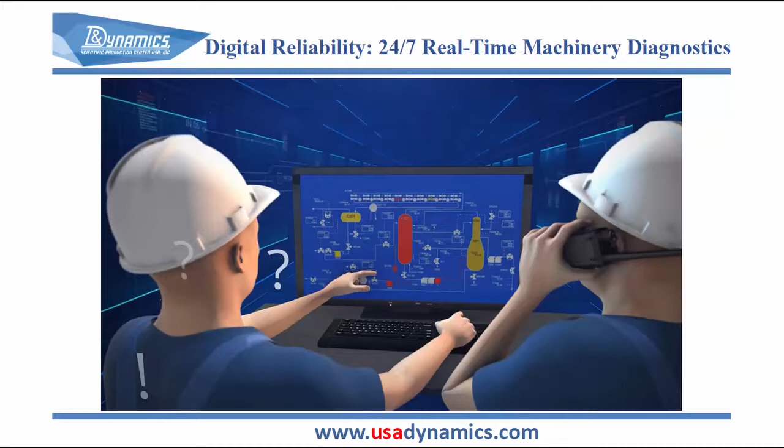It gives an opportunity not just to prevent the possible issue, but also allows people to eliminate future issues at an emergent stage, and to prevent not just failure, but even redundant maintenance and repair.

Within the last 70 years, the conventional approach to keeping reliability of machinery at a certain level hasn't changed significantly. It's based on 3 primary pillars: a safety factor, which is the ratio of a machine's structural capability to actual applied load; operational discipline of personnel, which is always striving to do the right things in the right ways; and failure recognition capability, which is an ability to predict failure before it happens.

At the beginning of the reliability era, the primary method for extending reliable uptime of machinery was increasing the safety factor. However, significant over-increasing of structural capability to actual applied load led to rising costs of machinery, which negatively impacted consumers' interests. So since the middle of the 50s last century, several approaches to providing reliability of machines were developed and implemented, such as preventive maintenance, proactive maintenance, reliability-centered maintenance, and others.

But all of those approaches have 2 common issues: poor statistics for machinery lifespan and human error. To confine the influence of those factors on reliability, since the 70s the main focus moved to increasing the failure recognition capability. Until now, scientists, engineers, and practitioners attempt to point out an instance of a machine's failure to be able to prevent its breakdown using different instruments and methods.

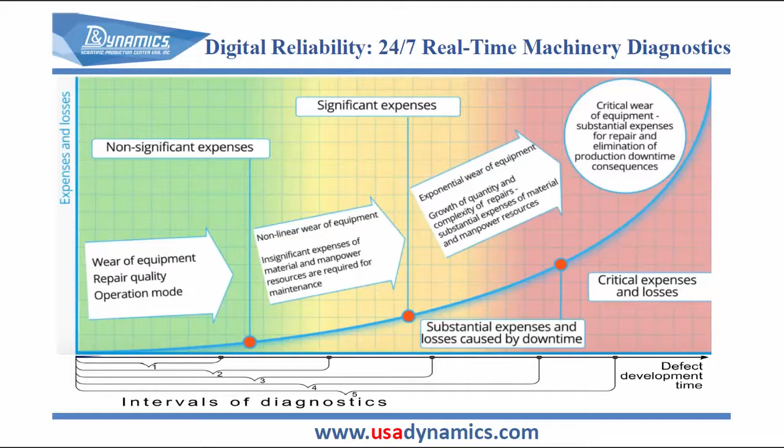While diagnostics itself is a process of defect detection, early diagnostics is a process of defect prevention. Existing solutions such as protection or condition monitoring systems are focused on confining consequences, not preventing breakdowns.

DCS merely shows the failure, at best correctly starting the emergency shutdown to minimize the consequences of equipment failure. It doesn't identify the fault at an early stage of degradation and take urgent actions to eliminate it. If the protection system alarms, the breakdown happens, or almost happens.

Even AI software solutions work at the end of the exponential wear stage, because the AI analyzes the same parameter that condition monitoring or protection systems measure.

Also, almost all condition monitoring systems require an expert to interpret them. Without that interpretation, the operator cannot understand what should be done to prevent an impending failure. This is the main reason why most breakdowns and accidents happen on the night or weekend shift, when the expert is not on duty at the facility.

To not only prevent failure but even repairs and maintenance, we need to identify the emergence of issues in the nonlinear wear stage, when destructive forces are just beginning to degrade the equipment. Operators need precise, proven, and timely information about what should be done to recover equipment health.

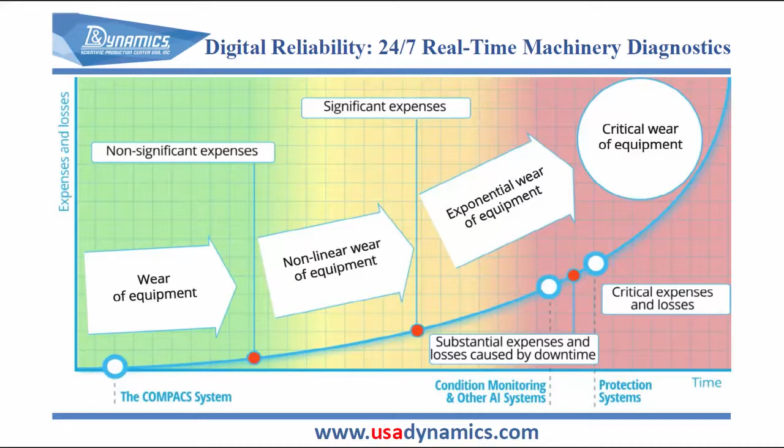The COMPACS system monitors all types of rotating equipment, including centrifugal and piston compressors, pumps, air coolers, etc. The system could be integrated with DCS, PI, and other systems over either Modbus or OPC UA interfaces.

The system monitors the health of every piece of equipment every 3, maybe 5 minutes, depending on the quantity of equipment at the facility. The diagnostic station is located in the control room, while the SCADA-type field bus gathers proper data for physics-based artificial intelligence.

Thus, artificial intelligence transforms sudden defects into gradual ones and alerts personnel by prescriptions on what actions need to be taken to prevent failure.

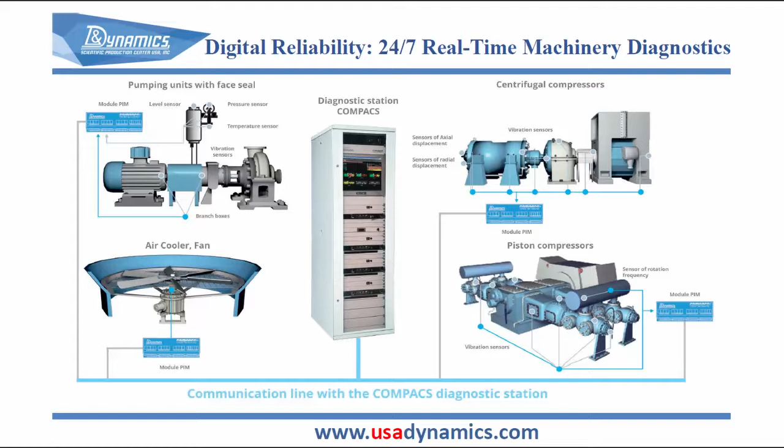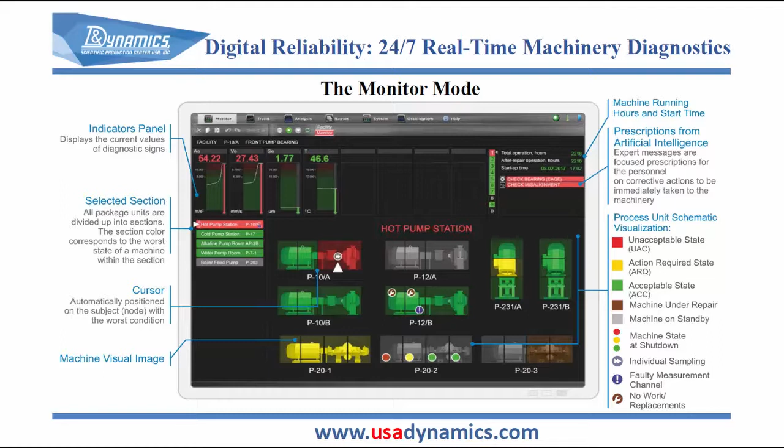The COMPACS system incorporates physics-based AI that identifies particular signs in the vibration signal which are related to particular defects and malfunctions. The physics-based AI consists of a library of rules of equipment degradation and a bunch of algorithms that could be chosen by AI to identify particular defects and malfunctions. Decades of scientific research are behind the components of AI. The physics-based AI is developed to recognize a wide range of defects and malfunctions in various types of equipment.

The system software itself doesn't contain machine learning algorithms, but they are used widely as updates are developed. The system has several rules of degradation which describe every defect or malfunction as a list of parameters of the vibration signal and other signals. Every parameter has its own threshold and strong correlation with a particular specific defect. So if the system identifies the parameter in a vibration signal, the defect exists and its stage of degradation is determined. This is the main difference between statistical-based AI and the physics-based AI we offer.

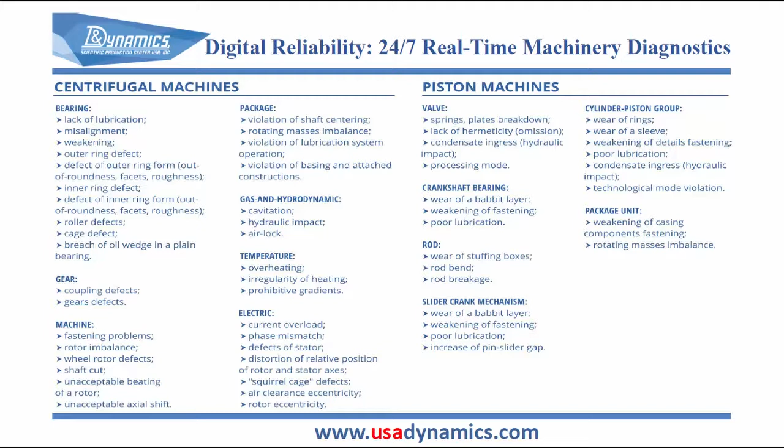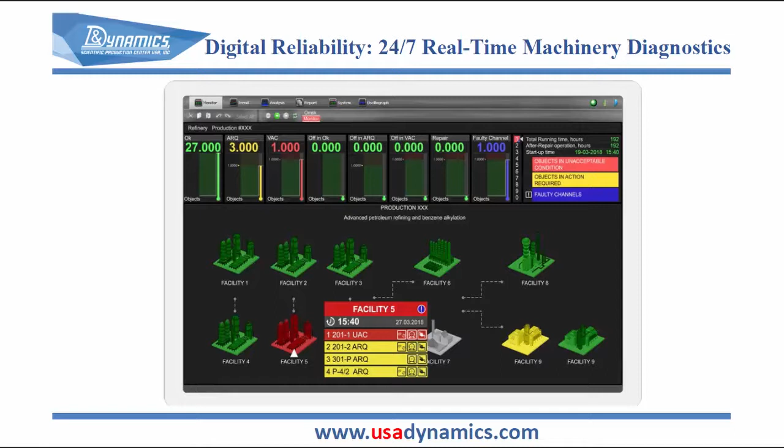The first information loop is dedicated to operators. Operators should play a crucial role in the reliability of the facility because they are at the facility 24/7. Therefore, the system identifies malfunctions of every piece of equipment in the facility and sends precise and timely prescriptions to operators. Operators are the only people who could prevent degradation at an emergent stage because they are still at the facility 24/7. This is the reason why we promote the operators-driven reliability approach. When prescriptions are received, they need to take urgent actions to improve equipment health and reliability. They could do this by themselves, call the maintenance department, or schedule contractors.

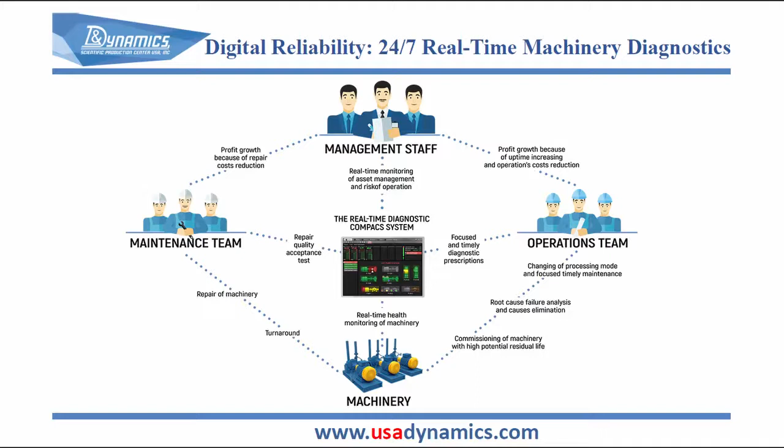In order to confine the influence on humans, we also have a third information loop for management staff. Management receives unbiased information about machinery health, about operators' involvement in the reliability process, and the quality of maintenance performed. The COMPACS system provides transparency for everyone involved in the reliability process. When people work together, they try to be better because they work in a transparent environment.

In terms of economic efficiency, the real value which the real-time diagnostic COMPACS system and digital reliability approach brings to a petroleum refinery comes from several sources. First, it prevents accidents and shutdowns. According to analysis of several trustworthy sources, in 2017 alone the average amount of annual refinery losses due to unscheduled shutdowns was approximately $150 million. Thus, by transforming sudden defects in machinery into gradual ones, refiners could avoid most of these incidents and corresponding losses, saving at least $100 million. Another source of value is extended uptime.

By decreasing turnaround outage and extending average uptime from the existing 91% up to a technically possible 99%, an average refinery could bring roughly $100 million of additional profit.

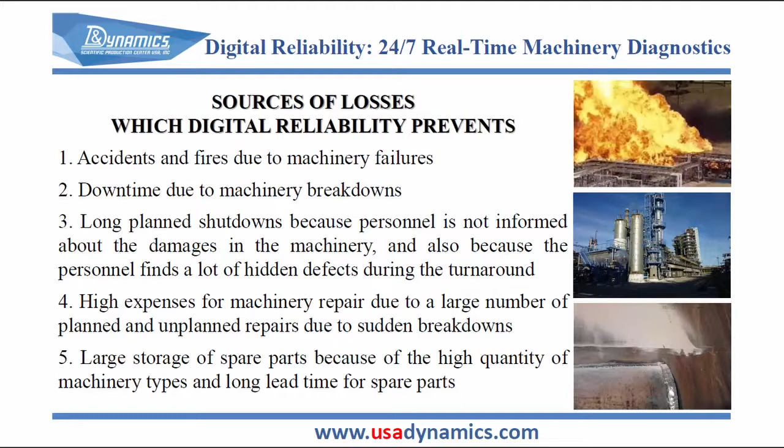An average US refinery spends over $9 million annually on maintenance, which could be reduced significantly as well. Totaling these figures, the total additional profit from a digital reliability approach based on the COMPACS system implementation for an average US refinery could reach $200 million annually.

Summarizing this, let's list the bullet points of digital reliability. In order to reach desirable outcomes in safety and uptime, digital reliability requires proper infrastructure for collating useful data from trustful sources using the SCADA structure.

Second, it needs physics-based artificial intelligence, which operates by invariance to extract information in time. Finally, it requires a planned diagnostic network for simultaneous information delivery to all levels of decision-making, from operators and engineers to managers.

The COMPACS system is the only one that meets those requirements and assists refiners to make the reliability paradigm shift toward safe, resource-saving operation and maintenance of machinery. It brings timely and objective information about machinery health, operators' involvement in reliability, and maintenance quality.

Moreover, it provides financial benefits which exceed investments in this solution by at least 10 times, provides confident safety of process operations, and generates prosperity for all who are involved and for those around them.

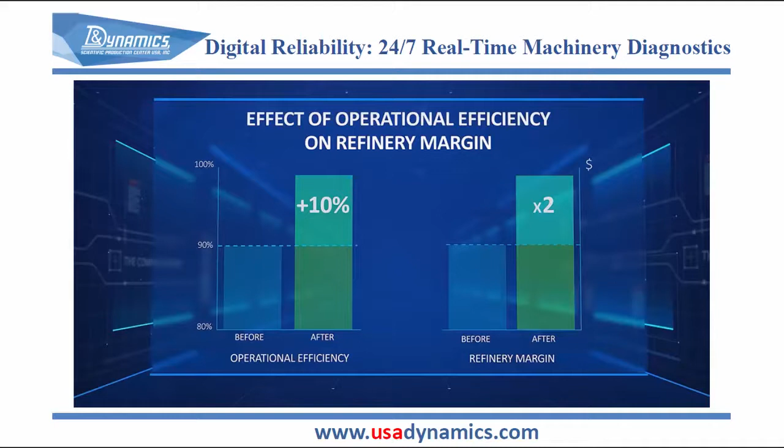In the last part of my presentation, I'd like to demonstrate how you could use digital reliability to approach paramount safety and uptime. To do that, you need to go through 3 steps. First is improving existing reliability.

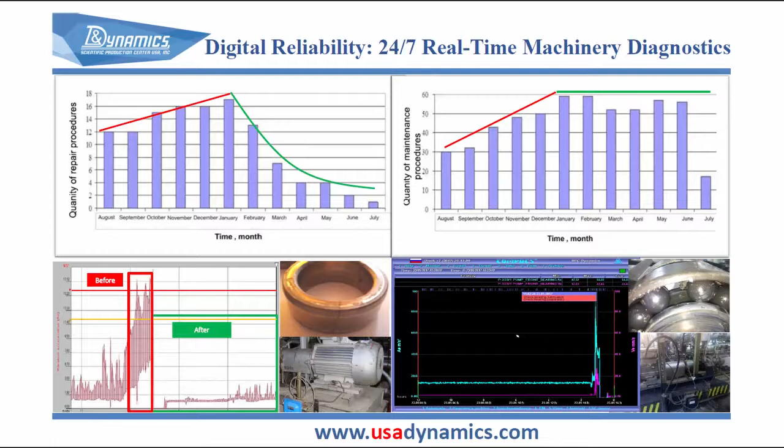But that was just the first step. The second step is eliminating the root causes of failures.

After the impeller was dynamically balanced, its health improved considerably. It also moved to an acceptable state, and its vibration decreased significantly. The root cause of the exhauster failure was impeller imbalance.

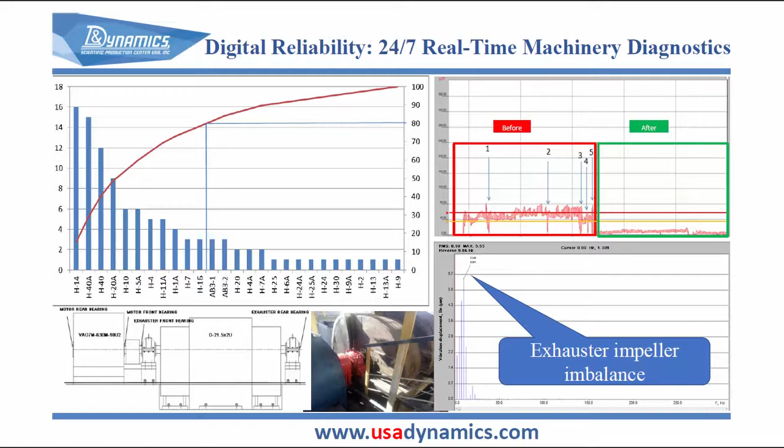Eliminating the root cause not only reduced the risk of unscheduled and unpredictable failures at the facility in the future, but also confirmed an upgrade to the existing maintenance procedures to include dynamic balancing in the map of the procedure. The third step toward safety and reliability is eliminating bottlenecks.

This is probably the most expensive step, but it's essential, because when the facility was designed and constructed, there was little concern with using the best engineering solution. Most engineering companies use technical solutions that are just good enough to get the facility running. Construction companies use the cheapest acceptable materials and contractors, and owners also don't want to overpay for the best solutions. As a result, there are several bottlenecks that confine the uptime of the unit.

When the reliability team compared the trends of valve deterioration with the trends of hydraulic shocks, they figured out there is a correlation. After each hydraulic shock, the suction valves quickly deteriorated. Further investigation revealed that there was no filter before the compressor, and it was dirty gas causing hydraulic shocks and consequently valve deterioration, thus poor compressor reliability.

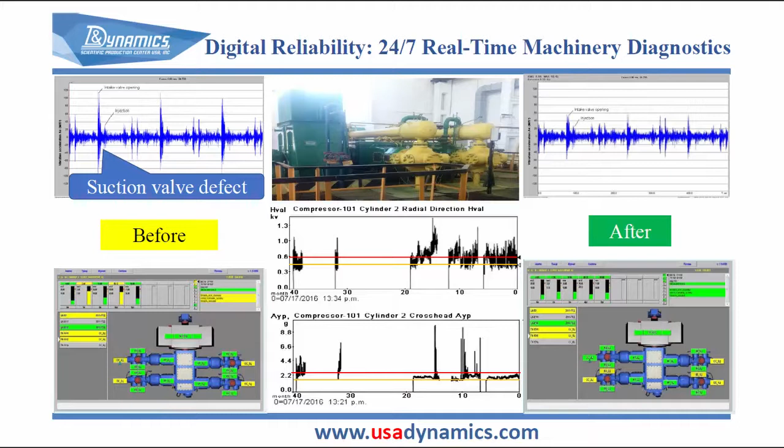Reactive maintenance is around 0% because if you know exactly what kind of issue a piece of equipment is having at an early stage, you don't need to wait till the issue turns into a failure. You can proactively eliminate it at the best possible time. Not everyone achieves this, but the Aromatics unit at the Omsk refinery did it. They have really achieved on-demand plant maintenance.

But what we're most proud of is the unit's availability, which is over 99%. The Omsk Aromatics unit operated for 3.5 years with zero downtime. This was possible not only because the COMPACS system prescribed timely maintenance and repair actions, allowing equipment to run without shutdown for the maximum amount of time, but also because the personnel are really involved in reliability and have a strong commitment to effectiveness and efficiency of operations, maintenance, and production management. In other words, they are deeply engaged in overall productivity.